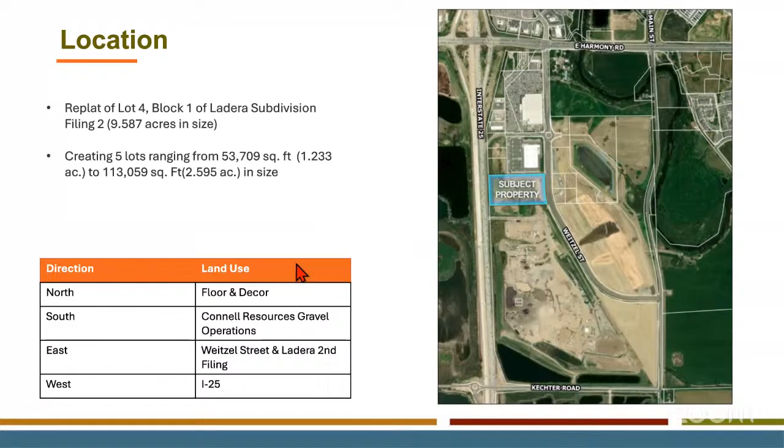This, as a minor subdivision, is going through the process in the land use code - planning commission recommendation to town council, who makes the ultimate decision. The public notice was posted on the property. Mailings were sent out to property owners within 500 feet, and the notice was published in the Coloradoan newspaper, given within the time frame specified in the code. So this public hearing has been well noticed.

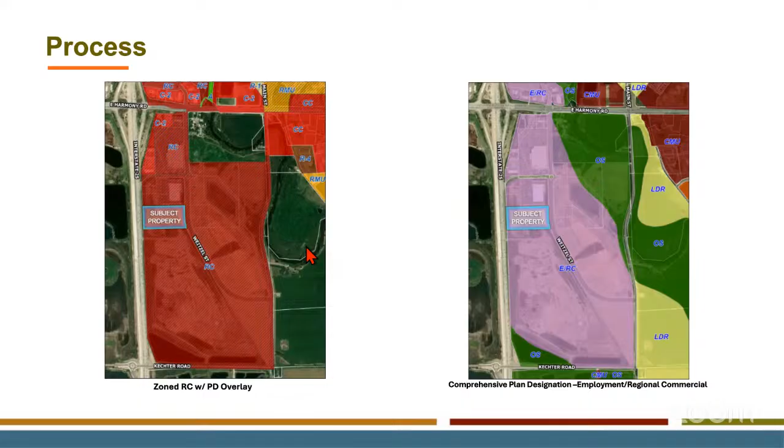The property is currently in the RC zone, and as you all probably know, the Ladera subdivision is all within a PD overlay area. So it's subject to those PD overlay approvals that have been done in the past. The comprehensive plan shows this as the employment / regional commercial designation. So what this subdivision is proposing is consistent with both existing zoning, the PD overlay, as well as the comprehensive plan.

This is just a diagram of the actual plat copied and pasted on here that they're proposing to do. The 5 lots have the gray areas which are an access easement, both emergency and vehicular access. There's some utility easements associated with that, and there's also an access and utility easement going between lots 4 and 5 down to the south. Most of the detail we'll see at the time of site plan review, as far as the layout, the parking lot, the private street, landscaping. So really what we're seeing is just utility easements and vehicular and emergency access easements, and the lot layout basically.

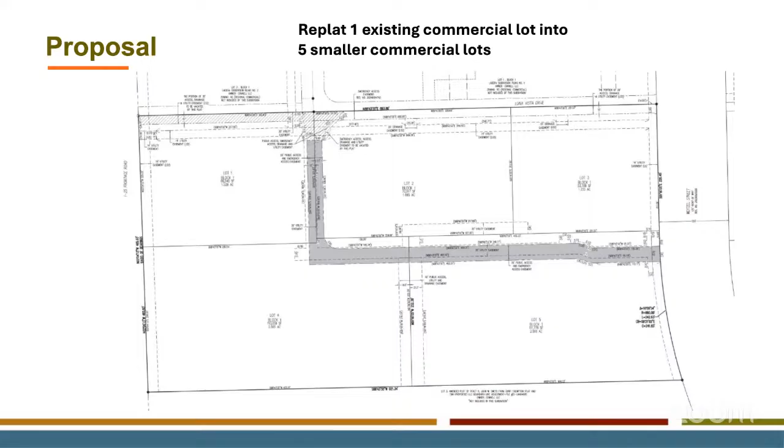At this minor subdivision level of review, it's not a lot of information that we're approving, and that's the way the code is directing us to review that. There are A through G criteria in the 2.9.10.11 A2 for the review criteria of minor subdivisions. It's consistent with the land use code, the comprehensive plan, and as I said, it was part of a major subdivision, this lot, and this is being replatted with this minor subdivision process. We've routed it to the utility providers and the outside agencies, as well as internal staff here. We're down to only a few minor comments that can be addressed prior to final signatures.

The minor subdivision process - I think this last item G - the way our minor subdivision process is written is a development can have, if it's more than 20 acres, and the overall Ladera is more than 20 acres, can have a total of 10 minor subdivisions within the development, and this would be the second. So they could have up to 8 more.

And it's my understanding, and you'll see this in the months to come, we're reviewing the preliminary plat for the remainder of the Ladera South area. This is a piece that's just north of what that will be, and it overlaps a little bit. They'll be replatting lots 4 and 5, but that's not really part of what we're reviewing tonight, just a heads up. The lots 4 and 5 that they're platting here tonight will become part of the preliminary plat in the future, and I think the applicant's presentation will show what I'm talking about there.

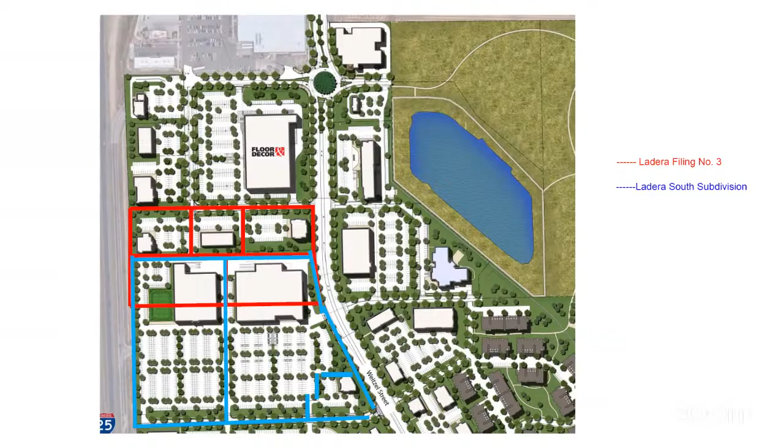Business public hearing item 7B, Timnath Landings PD overlay amendment number 2. And that's you, Chad. Do I understand you're going to discuss both together? We obviously vote on them separately and there'll be public comment, but I was going to do the presentation of both at once, allowing time for the applicant to do their presentation as well. But then our discussion should be solely based on each individual item. Very good, thank you.

All right, so item 7B is for the Timnath Landing Planned Development Amendment Overlay number 2. The applicant group is PCS Group, represented tonight by Jeff Norberg. The owner is CAC Timnath LLC, represented by Nick Montalbano. This application seeks approval to amend the Timnath Landing Planned Development Overlay District. The primary objective of this amendment is to modify certain dimensional standards within the land use code for future residential development within Timnath Landings.

The original planned development overlay was approved in August of 2015, which governs parcels 1 and 2 of the Timnath Landing subdivision. That makes up the entirety of the Timnath Lakes community, containing 497 acres. The adjacent land uses are the approved McMorris subdivision to the north, Walker Manufacturing within unincorporated Larimer County to the south, Harmony Club to the east, and the remainder of the Timnath Landing subdivision to the west.

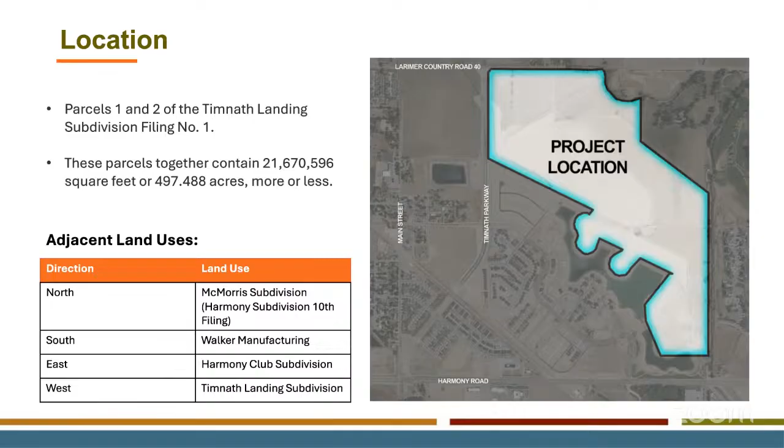So within the process, this is a zoning document or application within the town, as hence where the arrow is there. Following this, any development or platting with this property would have to follow these dimensional standards or amendments to the PD overlay moving forward.

Also in accordance with Table 2.1, preliminary plat application does require recommendation by the Planning Commission and a final decision from Town Council. You as Planning Commission shall recommend to the Town Council either approval with conditions, or denial based on our land use code. And the site was properly noticed, all by physical posting on the property, letters within the surrounding property owners, and the notice within the Coloradoan.

So the properties are zoned, the base zoning for these properties are a mixture of the R2, R3, and CMU, which currently have the existing PD overlay within it.

Within the comprehensive plan, it is designated as medium density residential. This is defined by the comprehensive plan to be the broadest category in terms of allowable density, providing for typical suburban development with considerations for adjacent land uses. The comp plan suggests an inclusion of small lot, single-family units, duplex, triplexes, and multifamily townhomes as primary uses within the comprehensive plan document, with secondary uses intended for neighborhood and community parks.

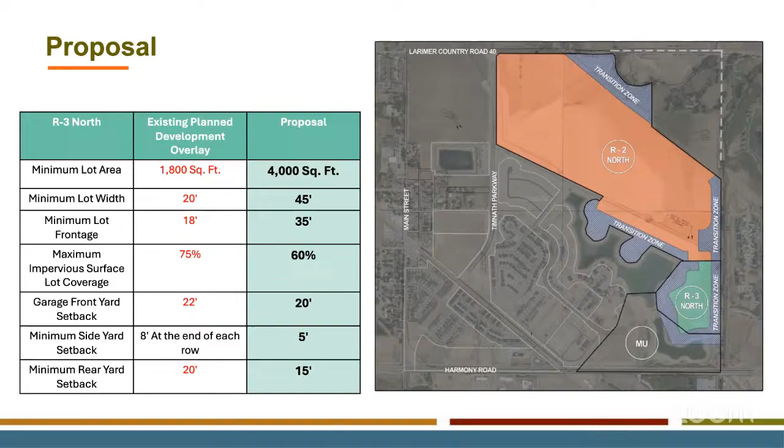The R3 zone in the southeast portion of the site, shown in green, is increasing its area to have a larger footprint and lot size to better match adjacent uses within Timnath Landings. They would have a 4,000 square foot minimum rather than 1,800, increase the minimum lot width and frontage, reduce surface lot coverage, and reduce the rear yard setback and front yard garage setback within that R3 green portion.

Then there's this transition zone, intended to maintain a more standard single-family residential design next to existing development or within the open space areas of the lakes. Everything in blue represents a product matching R2 standards. I apologize, this graphic is not correct - they would meet the R2 standards: 7-foot setback, 6,000 square foot lots, and all the dimensional standards of R2. My apologies for that confusion.

Chad, wait a second. What are you referring to, what is it corrected to? Sorry, this mouse appears to be dying.

So the transition zone is anything in blue here, adjacent to either the lakes or development that is existing to the east. They would fall under the standards of R2, and I can just read through what that is to clarify.

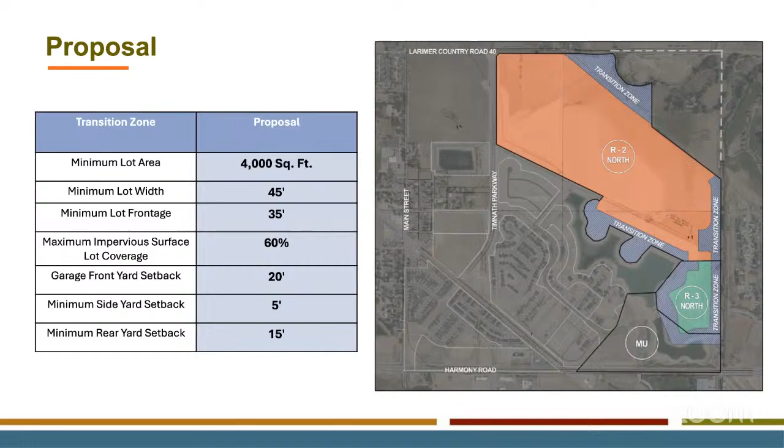I'll take this off the screen so it doesn't confuse anyone. The minimum lot area will be 6,000 square feet in that blue boundary, minimum lot width 54 feet, lot frontage 35 feet, and impervious lot coverage 60%. The garage setback maintains 22 feet per code, with a 7-foot side yard setback and a 20-foot rear yard setback. This helps limit impacts not only on view sheds into the lake and mountains, but also to adjacent property owners to the east or west.

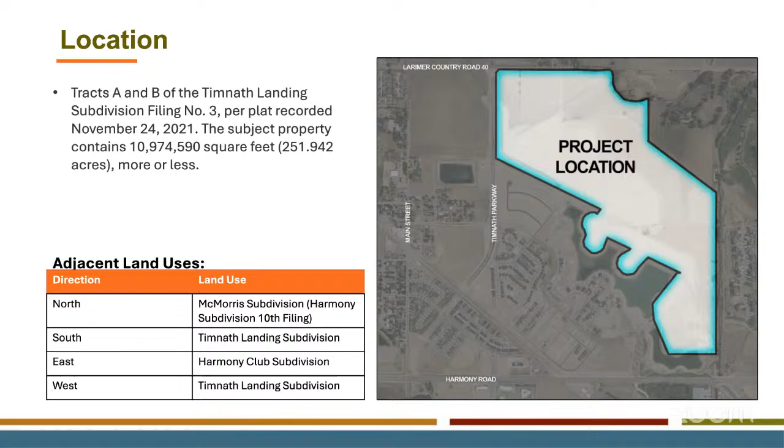Again, we already touched on the adjacent land uses. The subdivision process does require all forms of noticing, which were done. This will require a recommendation from you as the planning commission, and the final decision will come from town council. The existing underlying zone districts are the same, so R2, R3, and CMU with a PD overlay. The comprehensive plan is medium density residential.

I do apologize for the graphic that is represented here. It's kind of a large plan set, so it was a little difficult to find the appropriate one. But the applicant team should be able to provide you a little bit more context graphically as far as what the proposal will be.

The proposed amendment establishes a gross residential density of 2.8 dwelling units per acre, consistent with the allowable density permitted within the R2 and R3 zone districts. The plat supports a development pattern and dimensional standards established by the Timnath Landing Planned Development Overlay number 2, which we just discussed. The proposed lot sizes range from a minimum of 5,300 square feet to a maximum of 13,673 square feet, averaging 6,709 square feet per lot within the development. This configuration supports a mix of housing types and aligns with the intended character of the subdivision.

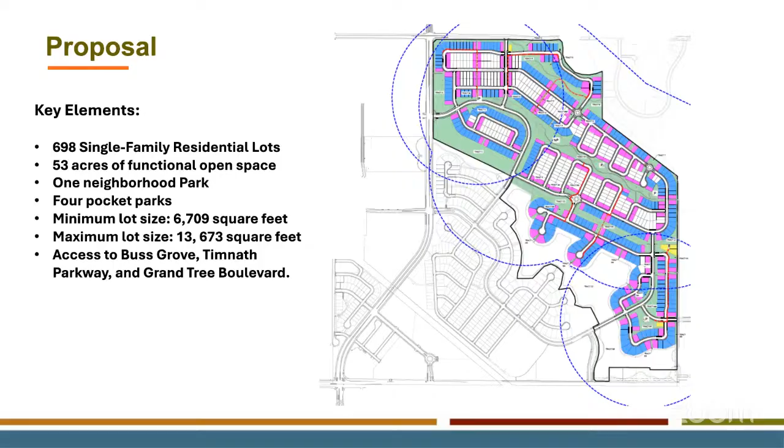Again, we have reviewed this against the subdivision review criteria and found that all criteria has been met with this application, as noted in your staff report.

One item I would like to mention, which is included in your packet, is that on June 4th we received a letter from Colorado Parks and Wildlife, CPW, identifying what is considered a high priority habitat within an adjacent property of this development. In that letter, they requested that the applicant consider their recommendations regarding these avian wildlife.

I did speak with the local district manager for CPW to get more clarity. He noted that the agency does not have statutory authority in Timnath, and it's just standard practice to provide this information as a recommendation. However, we recognize the importance of their department, so we are suggesting that we continue discussions between us, the applicant team, and CPW to identify areas of concern and work with best practices to limit those concerns.

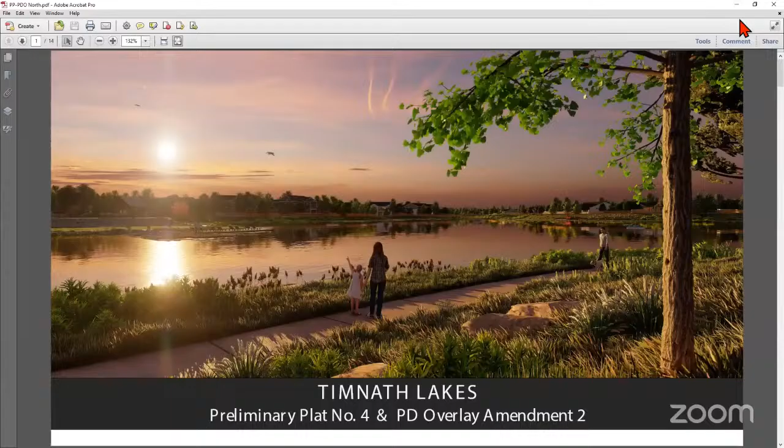Thank you, good evening, thank you all for your time tonight. My name is Jeff Norberg. I'm with PCS Group, here to present the PD Overlay Amendment 2 and Preliminary Plat Amendment 4 applications on behalf of CAC Timnath. I'd like to take a moment to acknowledge the development team whose efforts have gotten us here this evening, and I'd also like to thank town staff for getting us to this evening as well.

I'm sure you're all familiar with the Timnath Lakes community. It's an approximately 500-acre master plan community located north of Harmony Road, east of Timnath Parkway, and south of Buss Grove Road. Much of the southern portion of this community has already been constructed, conforming with the original sketch plan approved back in 2015, pictured here. The area in yellow is the subject of tonight's development applications.

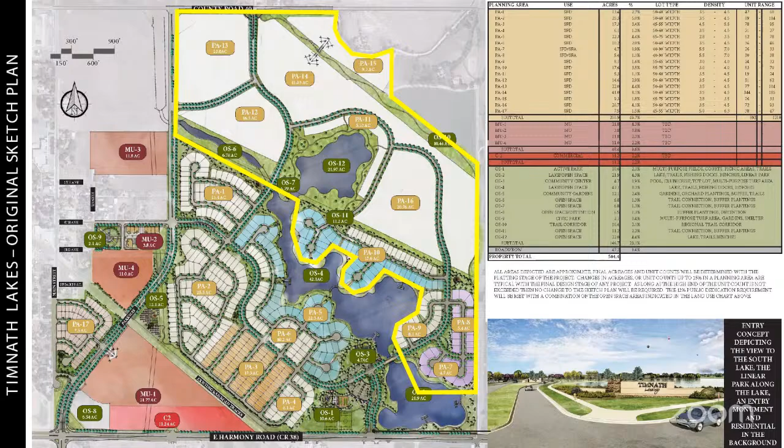Earlier this year, we received approval on an amendment to the sketch plan, which essentially updated the sketch plan to match what we were proposing at the time, and you'll see later what we continue to propose. Primarily, the lake on the north side of the development was moved to the west side of Timnath Parkway and was essentially replaced by a neighborhood park to serve as the central design feature of this north phase of the community.

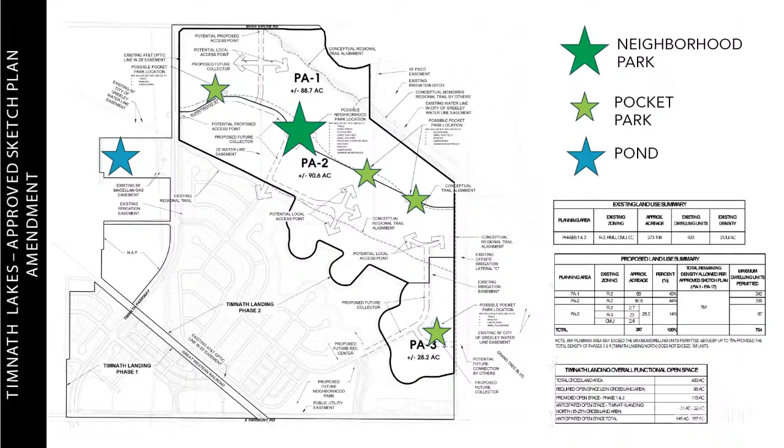A PD overlay had been approved back in 2015 that aligned with that original sketch plan. The dimensional standards of the underlying zoning, as Chad mentioned, were somewhat different at that time, as were some of the allowable uses. The primary purpose of this PD overlay amendment is to update the PD overlay to align with the revised sketch plan.

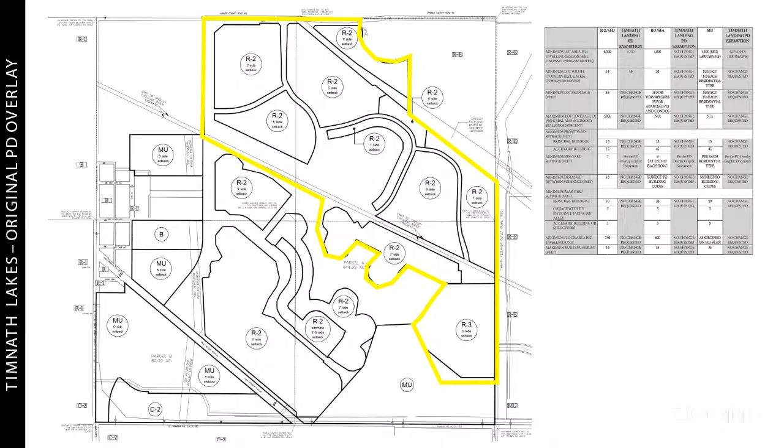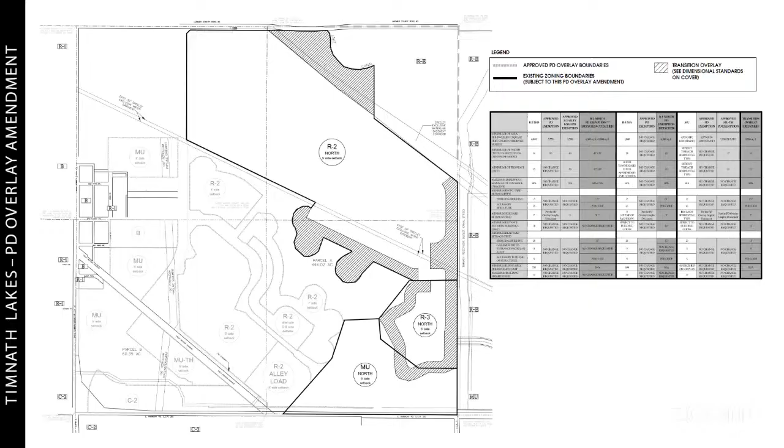This phase of the community will also see the construction of important trail connections as found in the Timnath Comprehensive Plan.

You may notice a prominent design feature of this phase is the linear park. It's approximately 12 acres in size and stretches almost entirely across this phase from east to west. Over 75% of the residents in this phase will be within a 5-minute walk of this park, and for about half of these folks, it'll be right at the end of their block.

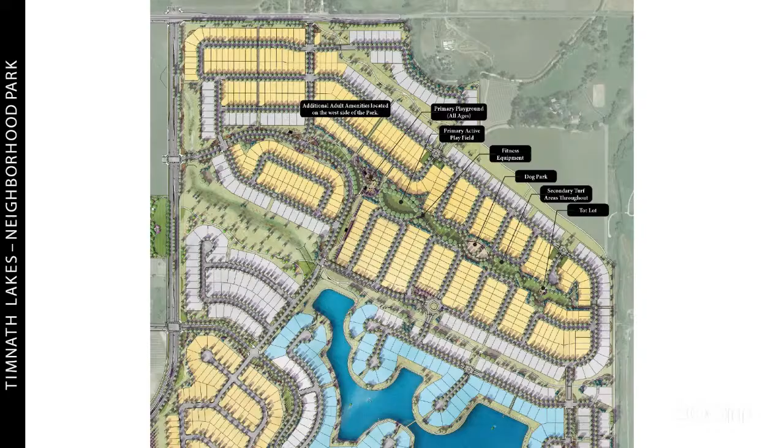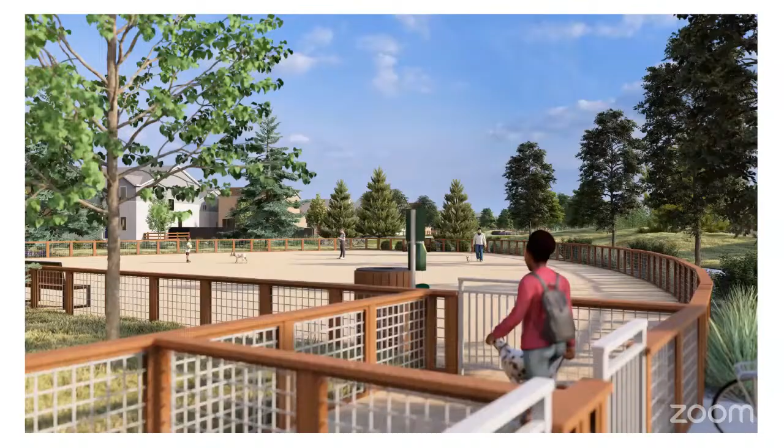These next few slides show renderings of the neighborhood park and the planned amenities, which include a large inclusive playground for all age ranges, multi-use turf fields, a dog park, and walking paths throughout the community and the park with connections to other parts of the community. We're really trying to provide as many amenities for as large a range of ages as we can within this park space.

In summary, we're excited to continue moving this high quality community toward its final areas of construction. These preliminary plat and PD overlay amendments will enable Timnath Lakes to move forward in a consistent manner with the approved sketch plan. That concludes my presentation. I'm happy to answer any questions you may have.

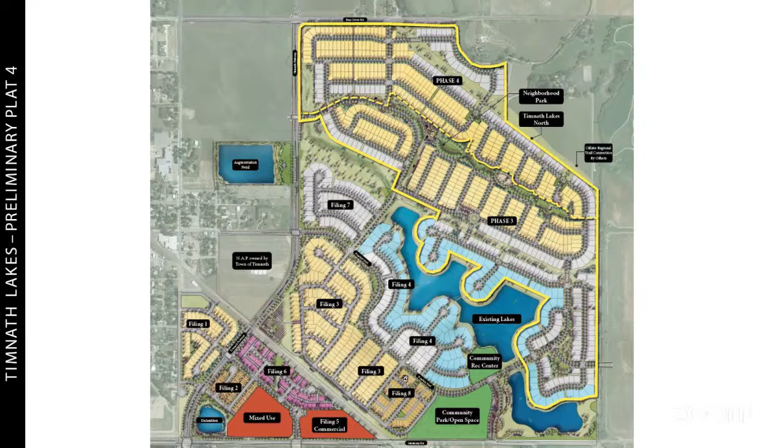All right, we'll circle back and vote on these separately. We'll tackle, Carolyn, some condition language regarding the CPW issue when we get to item 7C. So, unless there are other questions or comments for Jeff or Nick or the staff, do I have a motion on business public hearing item 7B, Timnath Landing Planned Development Overlay Amendment number 2?

I have a second? Okay, all in favor, say aye. Aye. Opposed? Nay. Okay, carries on a 4-0 vote. 4-1, excuse me.

Now, Carolyn, incorporating what I was suggesting and Renzo endorsed, what would you suggest as an appropriate condition or otherwise to address the issue about the CPW oversight? Okay, thank you. The current drafted proposed condition is the applicant shall continue to collaborate with the CPW or relevant environmental agencies to identify any potential areas of disturbance to known protected wildlife species.